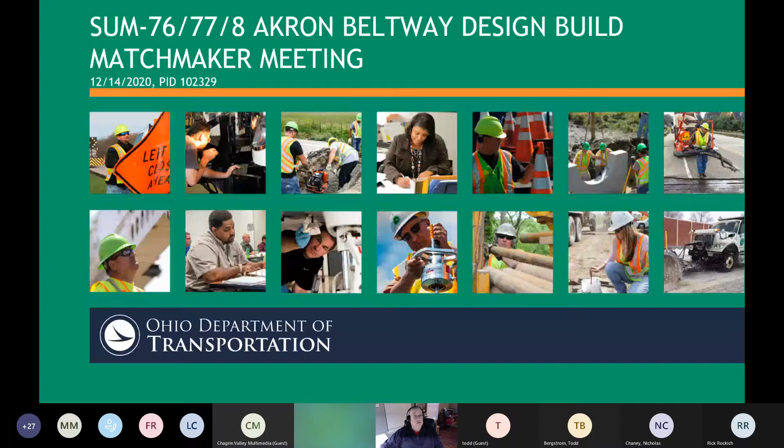This is a presentation that we presented about a month ago to potential DBE firms that were interested in the project. Primarily, it's the same presentation with a few extra added slides near the end that talk about the process a little bit more that we've worked out in the last month or so. So if you weren't on a month ago, this will all be new to you. If you are on, this will be a recap, a refresher.

Some of you may be familiar with ODOT, and I just wanted to give you our mission and our vision. Our mission is to provide the easy movement of people and goods from place to place. We will take care of what we have, make our system work better, improve safety, and enhance capacity. Our long-term vision is a reliable, professional, and highly productive organization.

If I can get somebody from ODOT to admit people to the room as they pop in, I would appreciate it. If you're not familiar with District 4, District 4 is comprised of Stark, Summit, Portage, Mahoning, Trumbull, and Ashtabula counties, with our headquarters located at Akron.

This is some interesting District 4 trivia that you might be able to use in the future. District 4 maintains over 1,400 bridges, over 7,000 light fixtures, 32,000 ground-mounted signs, 282 traffic signals, and 412 miles of guardrail. Compared to other districts in Ohio, we are first in the number of bridges carrying interstates, third in the number of bridges that we inspect, and we maintain over 20% of all signals statewide, and we're first in the number of lane miles maintained.

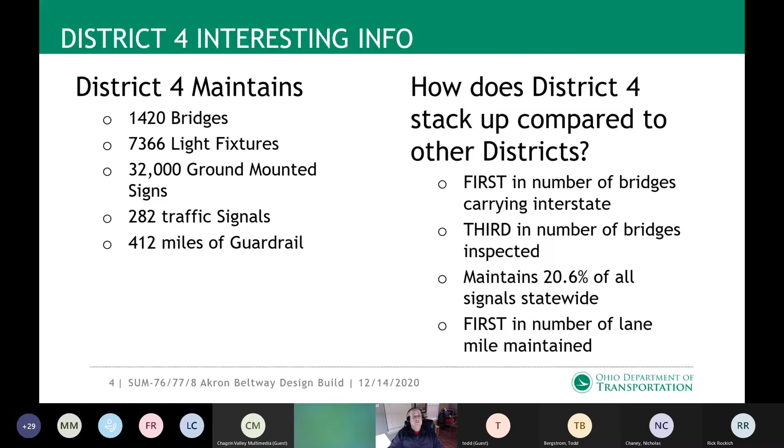Now we'll get into the project a little bit. This map shows the project location, around Akron. Around Akron, you have what we call our Beltway or our box, our interstate system that makes a square rectangular shape around the city. We are going to be working on the east side of the box. Locals might call that the south leg, between Waterloo and the Central Interchange, which is the blue area here, which locals call the Central Interchange. This is the interchange of 76, 77, and Route 8.

The north side of our box, our Beltway, is known as the west leg to a lot of the locals in that section. It will extend kind of out from the northwest corner a little bit up towards Cleveland.

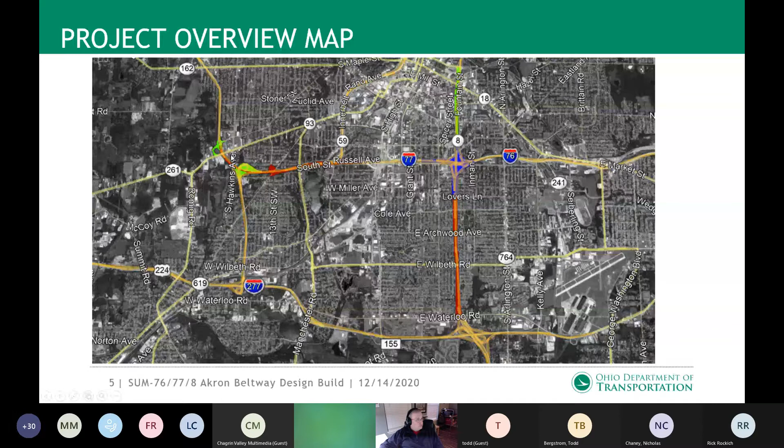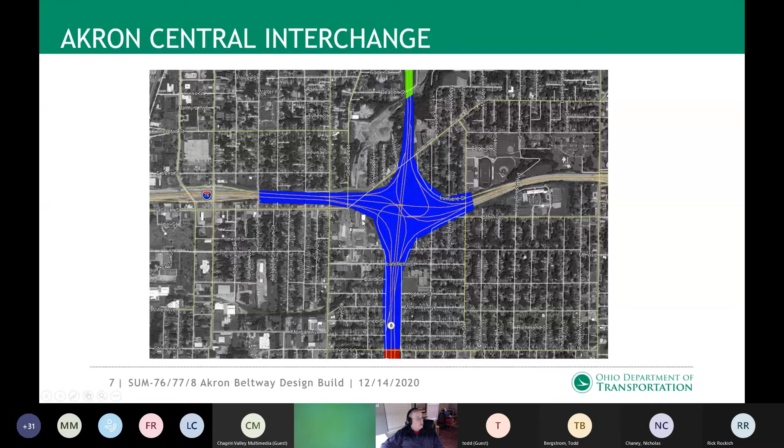If we go back and look, I'm first going to talk about the Central Interchange, which is this blue section right here. Central Interchange is basically full reconstruction with new flyover bridges going westbound to southbound. We have the left-hand ramps, and then eastbound to northbound, we're replacing those bridges plus other work within the Central Interchange.

The primary work that we are doing in the Central Interchange is to replace the left-hand exit ramps, both eastbound and westbound, with flyover bridges, and reconfigure the lanes, both eastbound and westbound, to provide drop lanes. We're going to remove the Lafollette Bridge and replace it with a pedestrian bridge, down here where you can see Lafollette. We're going to widen mainline bridges over Brown and Inman Street. Brown Street is over here, and Inman Street is over here.

Full pavement replacement. We'll be installing noise walls, retaining walls, replacing all the traffic signing and traffic control. We're also providing aesthetic treatments to the bridges, retaining walls, noise barriers, and the Heritage Trail bridge.

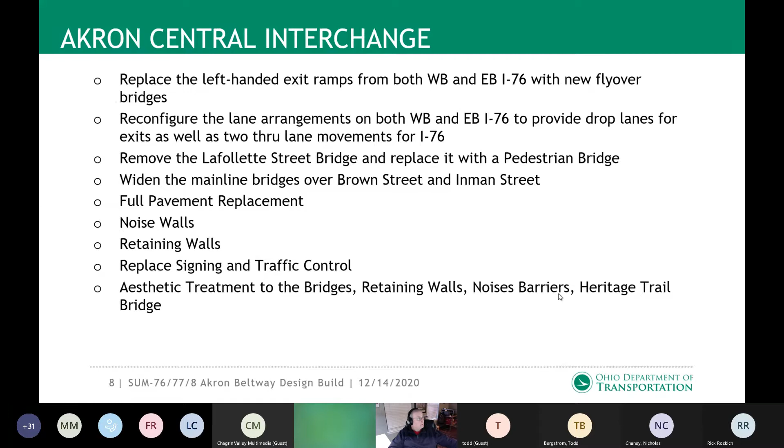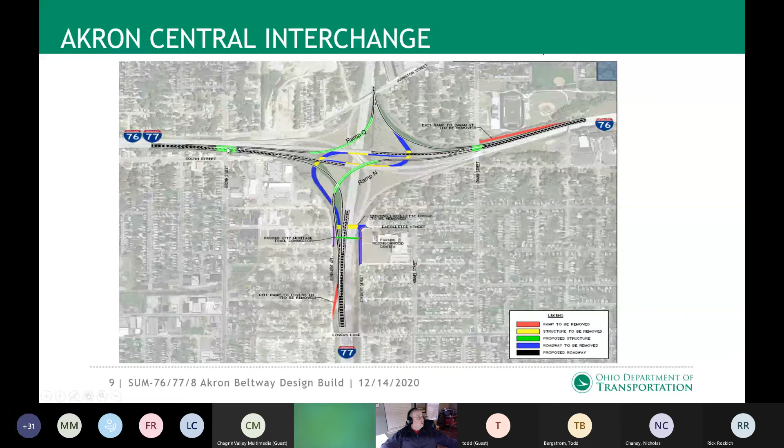This is a representation of what it should look like when we're completed. Again, these are the left-hand ramps that I mentioned, ramp N and ramp Q. The pedestrian bridge is down here south of the interchange. Inman Street is to the east and Brown Street is to the west.

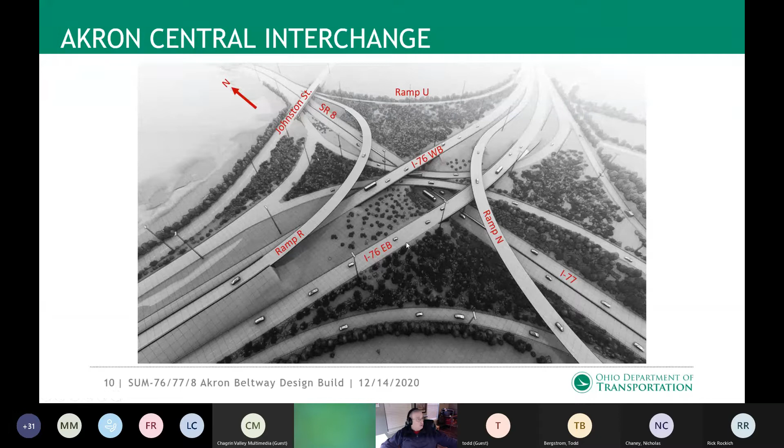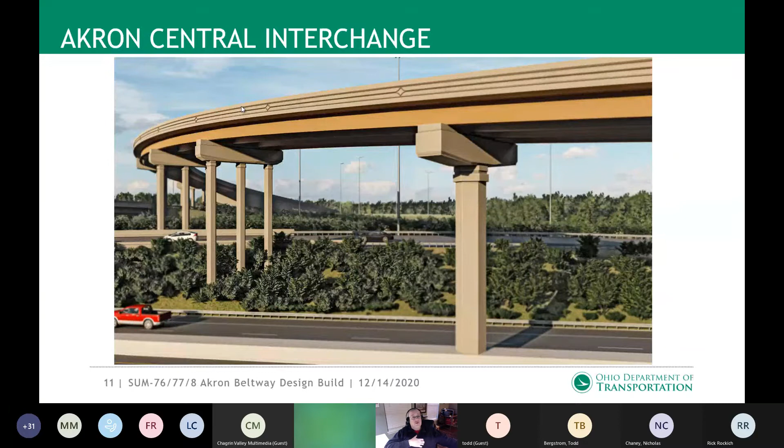Another representation of what it should look like when we're done, kind of an aerial view with north pointing up towards the upper left corner. I mentioned aesthetics a little while ago. This is an artist's rendering of what our flyover bridge will look like when we're completed with this project.

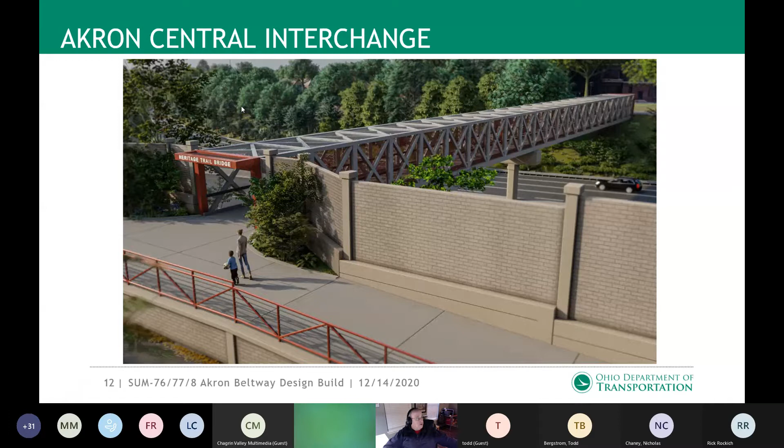Another artist's rendering of the pedestrian bridge, or the Heritage Trail Bridge. You can see the noise walls in front of it.

On the north and east side of the Beltway and State Route 8, we're going to be doing full depth pavement replacement on the main line and ramps, which are shown in red in my previous sketch. I'll go back to those in a minute. We're going to be resurfacing the ramps at the northwest interchange and at the 261 Vernon Odom interchange.

We're going to be resurfacing State Route 8. We're going to have major work performed on 3 bridges: I-76 over Manchester, 76/77 over Bowery, and then over Lakeshore as well. Again, we're replacing signing and traffic control. Maintenance work on various bridges will be performed, and capacity improvements along the 77-8 corridor are going to be done.

Additional lane from Carroll Street to 277 on Route 8. Actually, from Route 8, Carroll Street all the way down to the end of our project, which is down near the interchange of 277 or Waterloo Road. We'll have an additional lane northbound from Waterloo or 277 to the split at the central interchange, and then we're reconfiguring the northbound off-ramp from State Route 8 to Carroll Street.

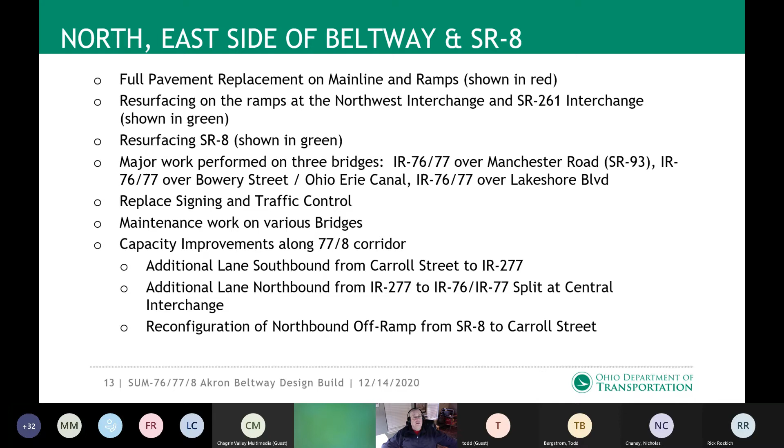This is the north side of our Beltway, which I just mentioned. You'll see these green areas are resurfacing, and the red is full pavement replacement. I mentioned 3 bridges. The first one we're going to do major work to is at Manchester or State Route 93. The next one is at Bowery and the Ohio Erie Canal, which is just west of Lakeshore. And then we're going to be doing major work to the Lakeshore Bridge.

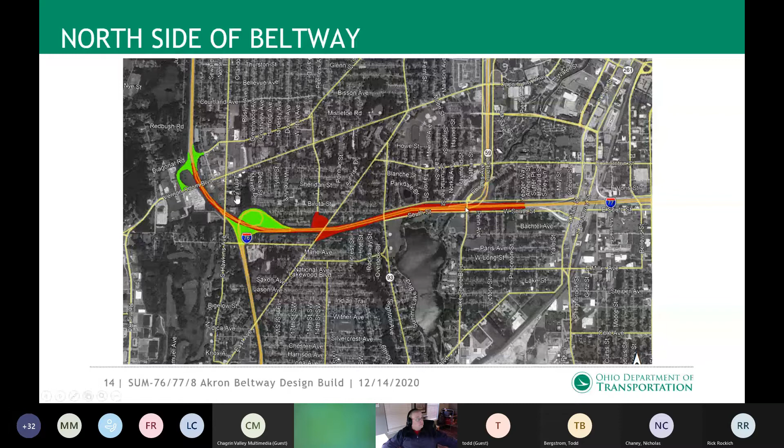This is a blow-up showing those 3 bridges I mentioned: Manchester, Bowery, Erie Canal, and Lakeshore.

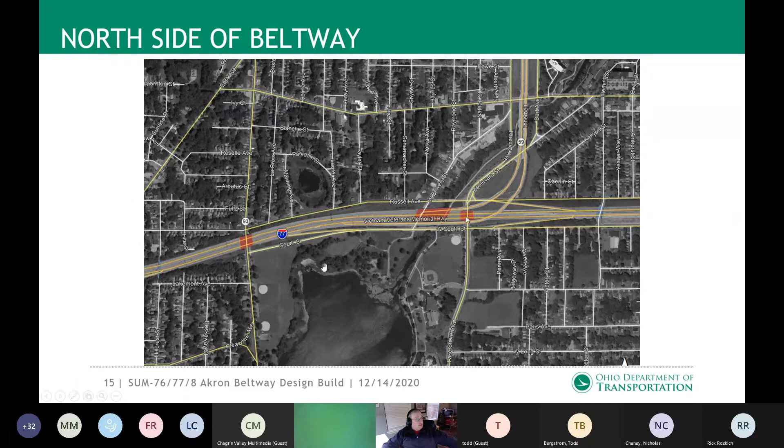This is the east side of the Beltway, north is to the right. So here's the central interchange in blue, and then the red is the other work we're performing, which again is primarily pavement replacement, and in that area, full depth pavement replacement.

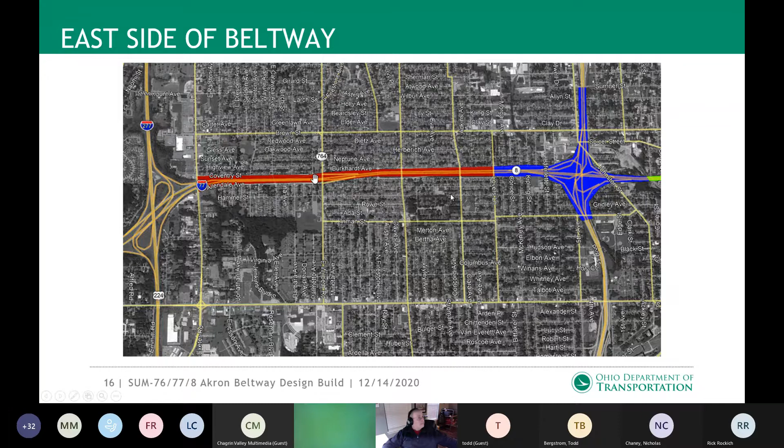This project is being procured as a design build project. You may not be familiar with design build. In a traditional project, the owner, which is ODOT, hires a designer and they have subconsultants to design the project. Then ODOT, or the owner, takes the set of plans the designer and subconsultant generate and sends them out to bid, and then the contractor and subcontractors bid the project and build the project.

So you always have the owner, or ODOT in our case, between the designers and the contractors. This is a design build project where we're the owner as ODOT, and then you have a design build entity, which includes the construction company, designers, trade, subconsultants, and there's a one-way path between the owner and the design build entity, or the design build team, which is what ODOT calls it, the DBT. I took these slides from the DBIA website. So that gives you an idea of how this is a little bit different than our traditional projects.

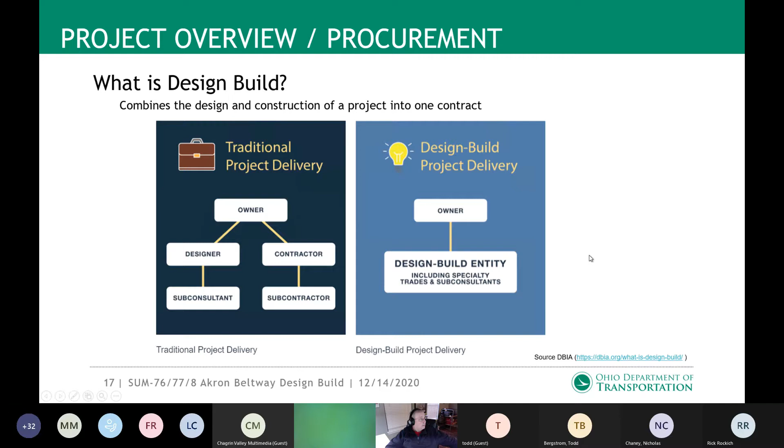Why do we want to go design build? We can generate cost savings due to collaboration between the designer and the contractor directly. It's typically faster than a traditional design-bid-build process because we've shortened the amount of time it takes to get it out on the street and start construction, and they move through design and construction much faster.

There are a couple different types of design build projects: a least cost and a value-based design build process. In low bid design build contracting, the contract is awarded to the lowest responsive and competent bidder. In value-based, it's awarded to the bidder with the best value score, determined by a combination of bid price and technical qualification assessment. We are going through a kind of hybrid value-based design build process — we'll be getting a technical proposal and also price proposals on this project.

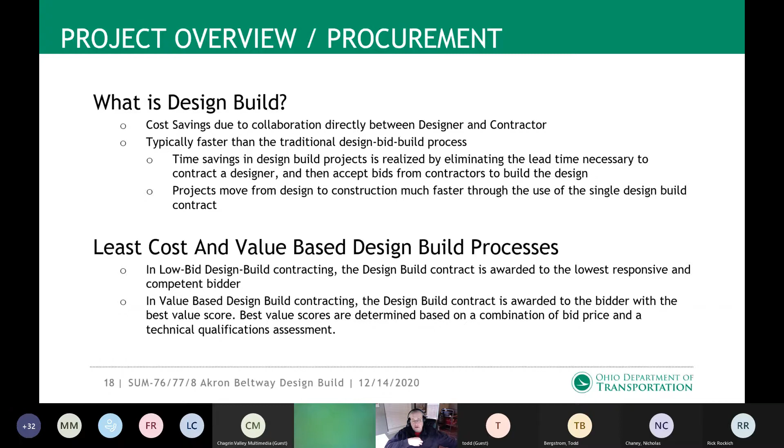This particular project, now back to our project instead of an overview of design build, is a hybrid design build project. The reason it's hybrid is the third bullet point on this slide, but I'll get there in a second. This is a two-step responsive low bid process. So we put this project out for statements of qualifications, and then shortlisted it down to 3 bidders, who are proceeding with their bids right now.

MOT was not included in those preliminary plans. So in our two-step price proposal, there are 2-step lowest price and technically acceptable proposals we're getting.

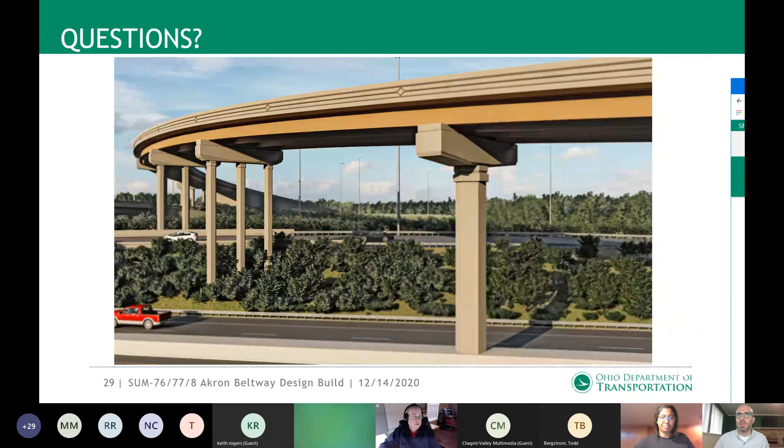Let's see here if I can show you real quick. Hey Tom, I just went ahead and put the link into the chat session. Oh, okay, but yes, you're on the right location. I just pulled up our ODOT construction contract information of sold projects. That's probably the easiest thing.

You can go to the bidding documents, and for this link, you have to type in the project number, which is 21-3000, and then you'll get all the bidding documents there. Or, this is another nice thing, you can get a bid documents listing, and this will give you a list of all the projects that are pretty much out to bid currently. This project is number 2 on the list, and you can get to proposals and addendas right here from that list.